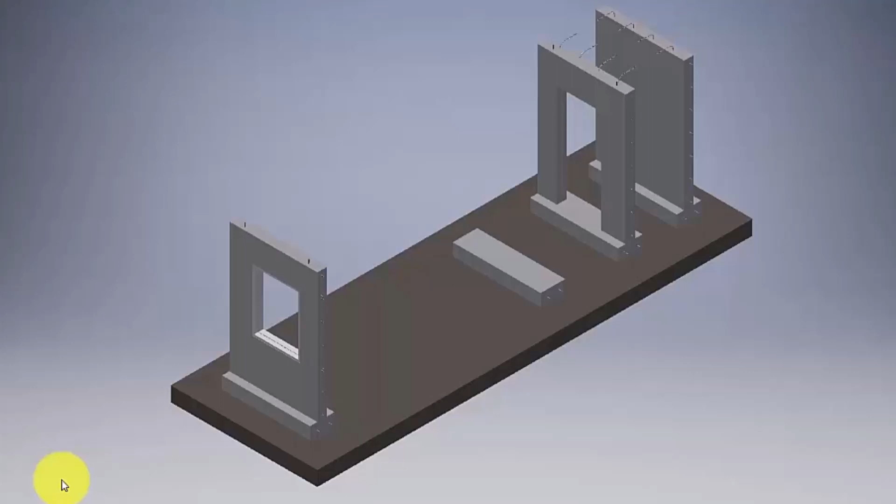Now we will add the floor. When pouring a foundation floor, first gravel is put in all the way up to the top of the footings. This will support the concrete.

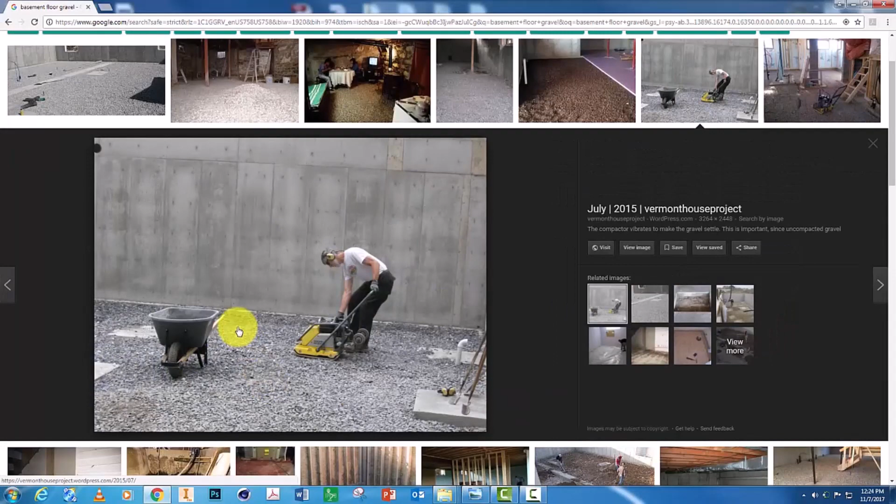Wire mesh is put on top of the gravel and then lifted up as the concrete is poured. This helps further reinforce the concrete. And then the concrete is poured and finished.

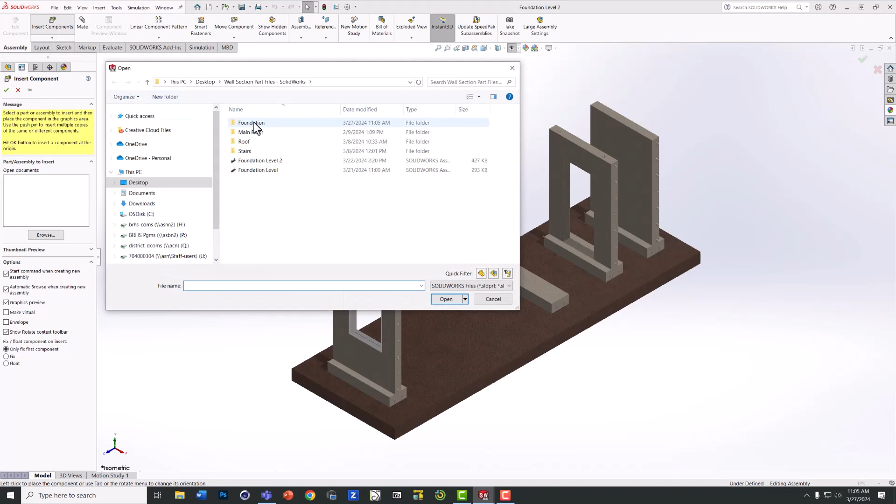Insert in the foundation folder gravel. This doesn't look too much like gravel, but it's going to be hidden anyway. Let's hit mate and start putting some relations on this.

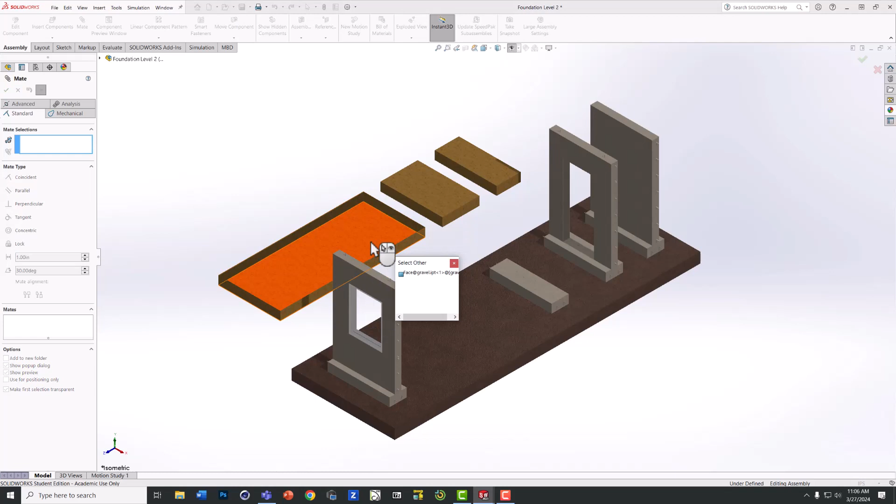First, I want the bottom of this gravel to be on the ground. So I'm going to right click right here in the middle, choose select other, and hover until I see the bottom light up. And we'll put a relation between that and the ground. Hit check mark.

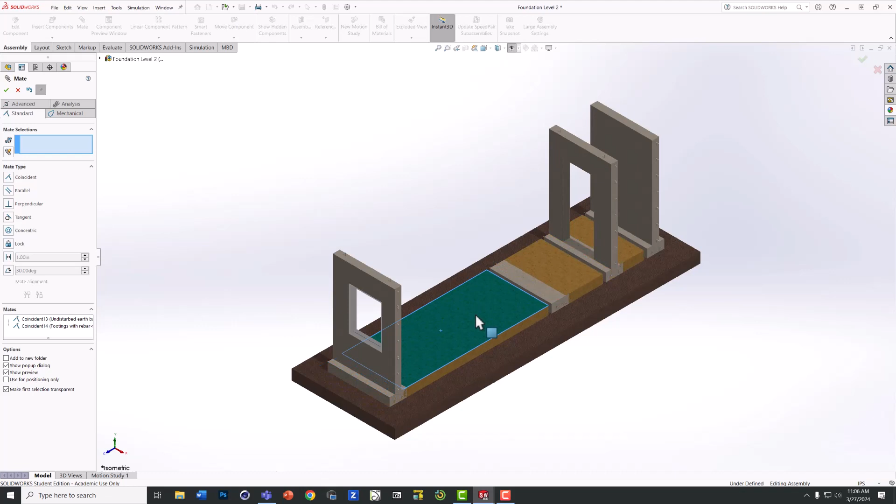Next, let's go side of the gravel to side of the footing. Check mark that, and then the last thing I need to do, I'm going to grab this and move it. You can see it'll only move in one direction because there's only one direction left for it to move. I think I'll move it just like this so I can see a little gap here.

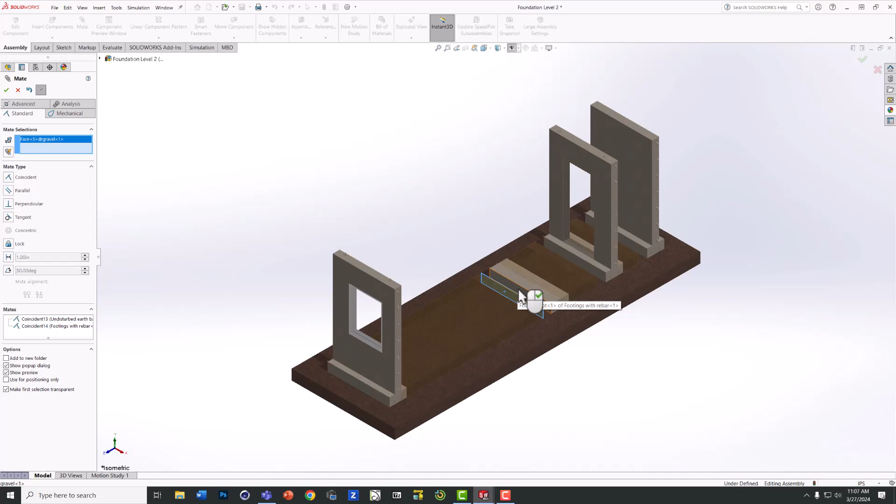I'll right click right here and choose select other, and I want this side, there we go, to be flush with that side of the footing.

So our gravel's dumped in. Now we're ready to pour the cement floor. So I'll exit the mate command and insert foundation slab.

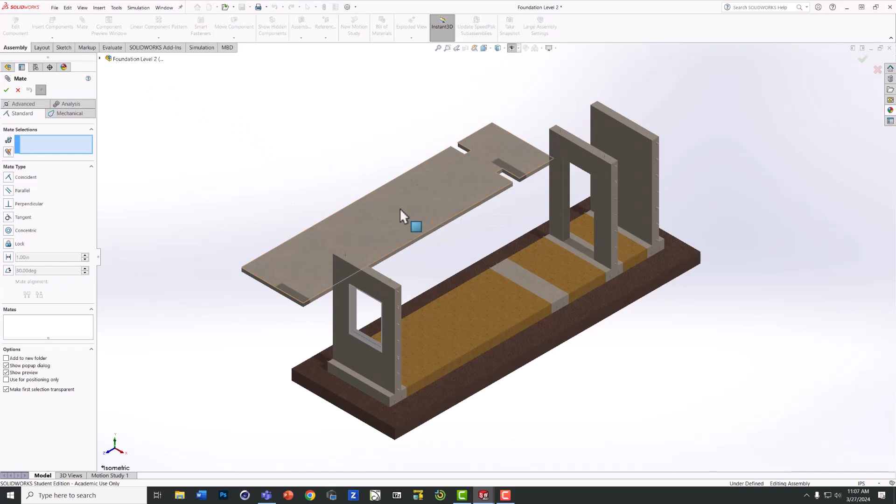And we'll go ahead and put mates on this, very similar to how we did the gravel. I want the bottom of that to be touching the gravel.

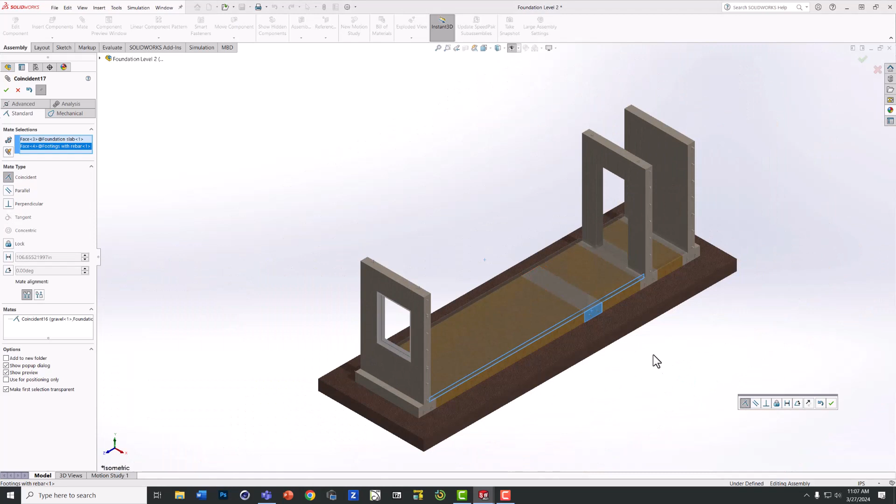The side, make sure I get the side there to the side of the footing. Let's check mark that, and then I'm going to back it up a little bit so that I can have something to work with here.

Okay, let's right click here and choose select other. I want this side of the foundation slab to touch that wall right there.

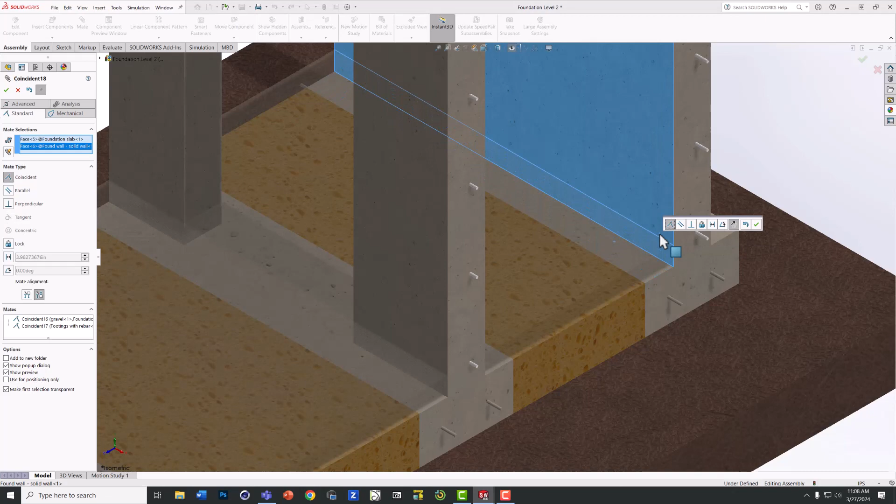And now our floor's in. We can assume that there's wire mesh in there that's reinforcing it. I'll press F on my keyboard to center this.

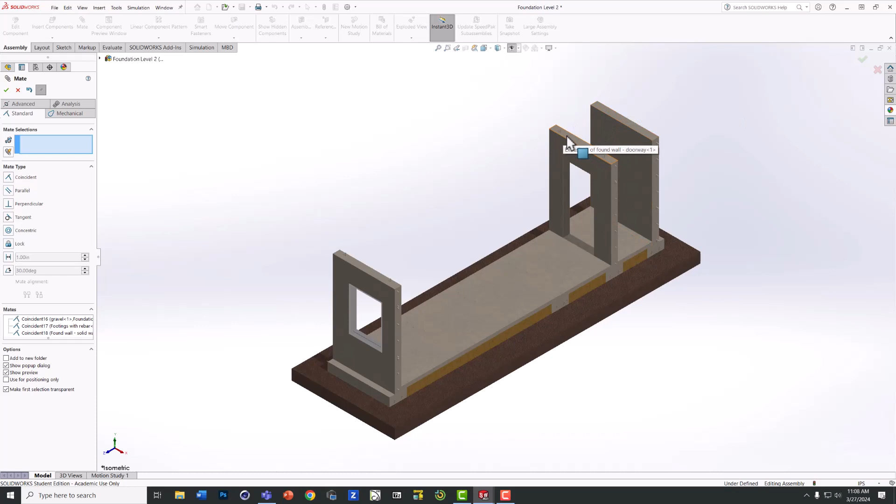We added anchor bolts in these foundation walls, and we're also going to add some rebar here. There's not going to be a wall attached out here. It's going to be a porch, a cement porch that we'll add towards the end of this project. But while the foundation walls are being poured, it would be good practice to add some rebar here while we add the anchor bolts.

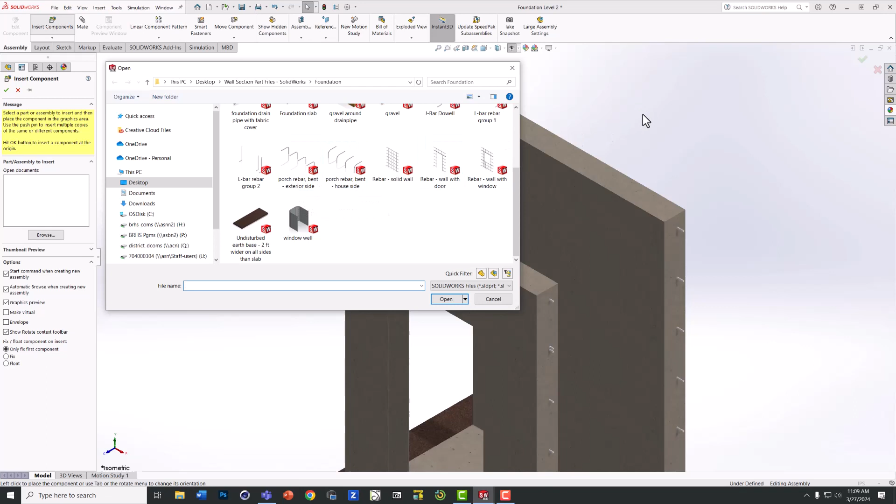So I'm backtracking a little bit here, but go ahead and we'll exit that mate command and insert porch rebar bent house side. We'll put this exterior stuff out here. So let's go with the house side first.

Place that in. And to put relations on this, let's go, I'm going to mate the bottom of this to the top of this footing, and then we're going to sink it down in later. So make that your first mate.

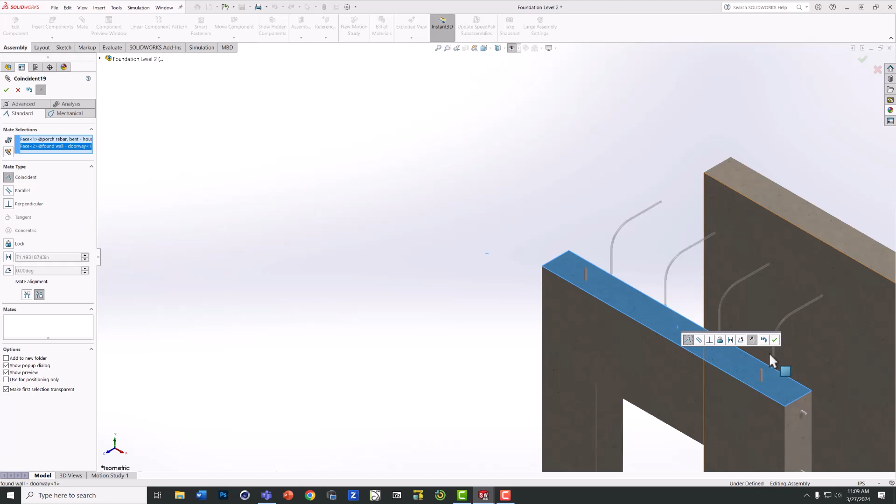If we sink it down in now, it's going to be hard to get the center axis, which is what I need to do next. So zoom in here, can be this first piece of rebar, and get that center axis selected.

And I'll select the side here, and we're going to set the distance, the offset distance to 12 inches.

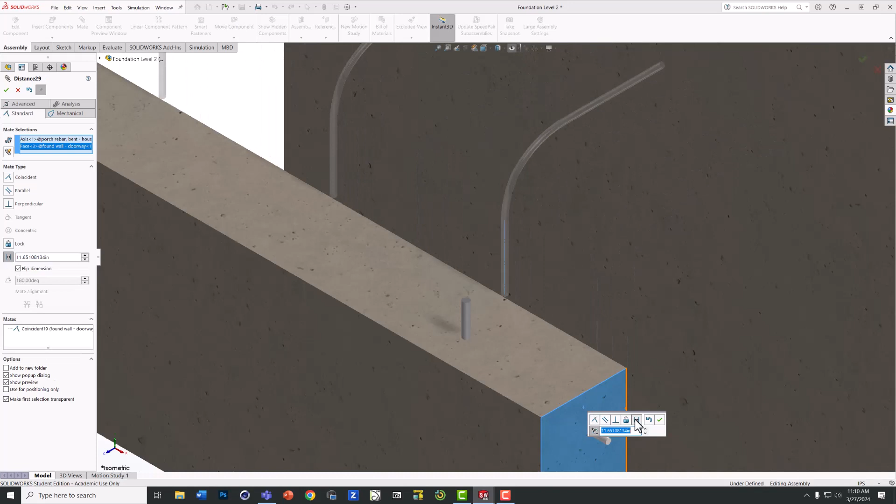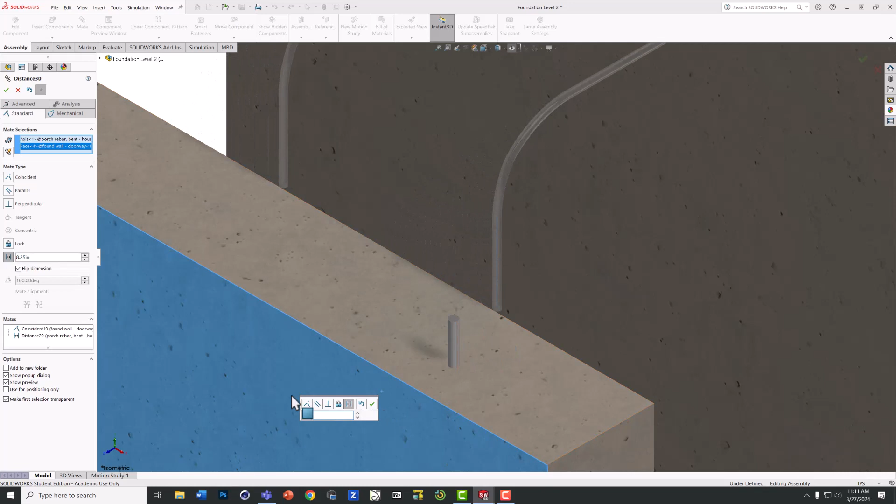And then we're going to get that center line again. We're going to put a relation here to the front. We're going to move it back quite a ways. It's going to be more to this side. So enter a distance of 8.25. Press the enter key, make sure it moves the right way.

Yes, we'll have anchor bolts on this side, which is where we'll attach the wall. And then we'll have some room here in our foundation wall to put the rebar. Go ahead and hit the check mark on that.

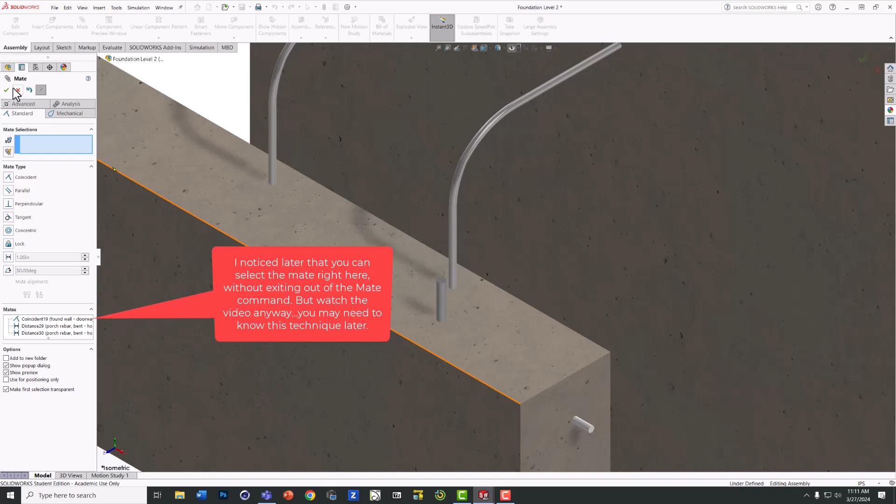And then to drop the rebar down in, we need to exit out of the mate command and open up our mates right here. And go down to the end of the list. This is the last mate we put in.

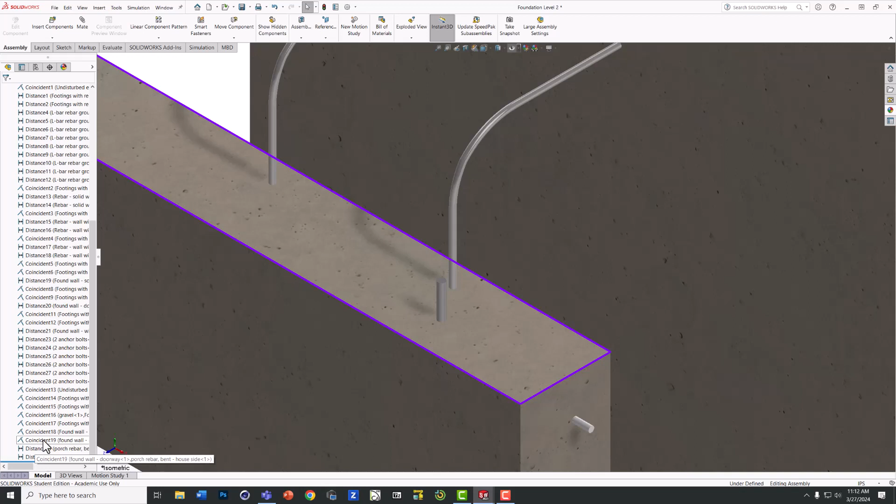So if we go back 1-2 steps, this is going to be the mate we need to adjust to sink that rebar down farther. If you right click on that, you have an edit button here with a pencil, and then your distance button becomes available.

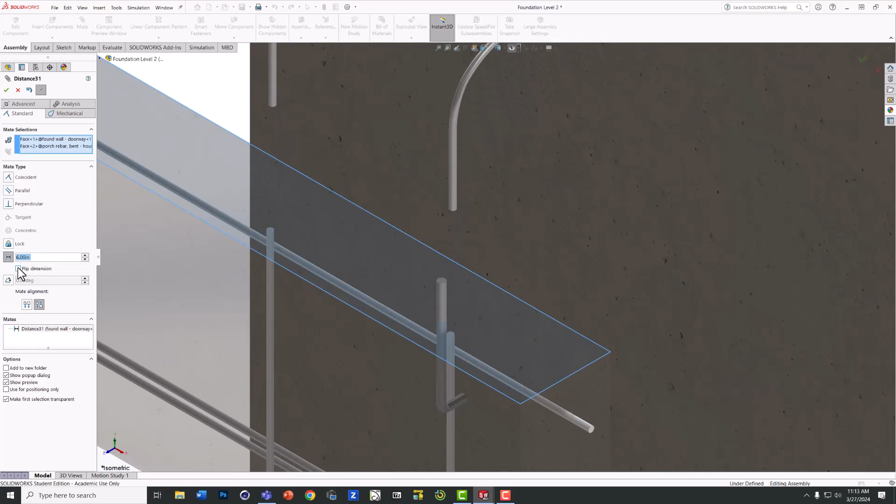Go ahead and drop that down 6 inches. Press the enter key, make sure it goes the right way. Mine didn't, so I'm going to hit flip. There we go. Then hit the check mark.

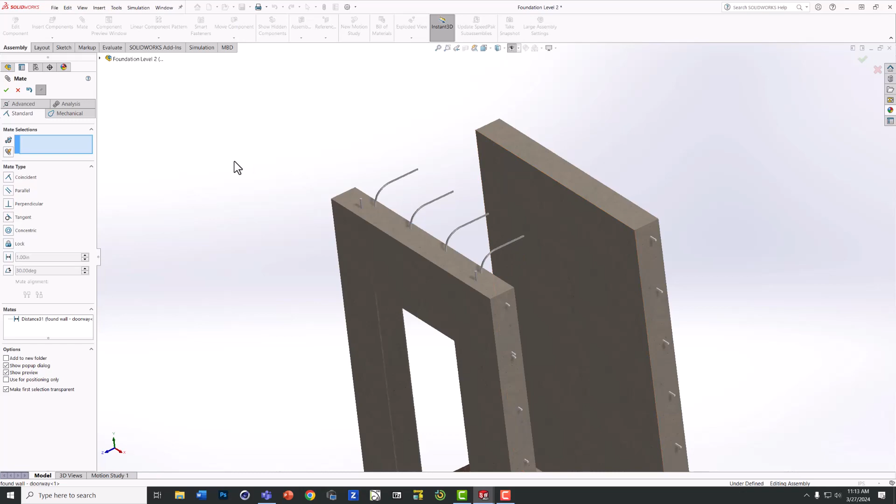When this rebar is put in and then the foundation wall dries, it can be bent down like this later. Let's go ahead and finish the mate command. Insert porch rebar exterior side.

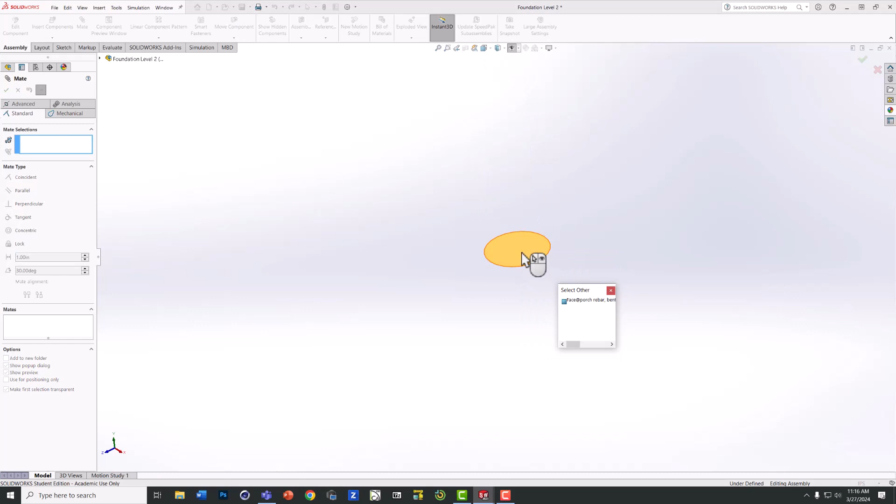Let's start our mate command here, and we're going to select the bottom of this piece of rebar again. So I'll right click and choose select other. Make that orange and blue, and we're going to go ahead and mate it there to the top of the footing. Mine's still floating out in space, but that's okay.

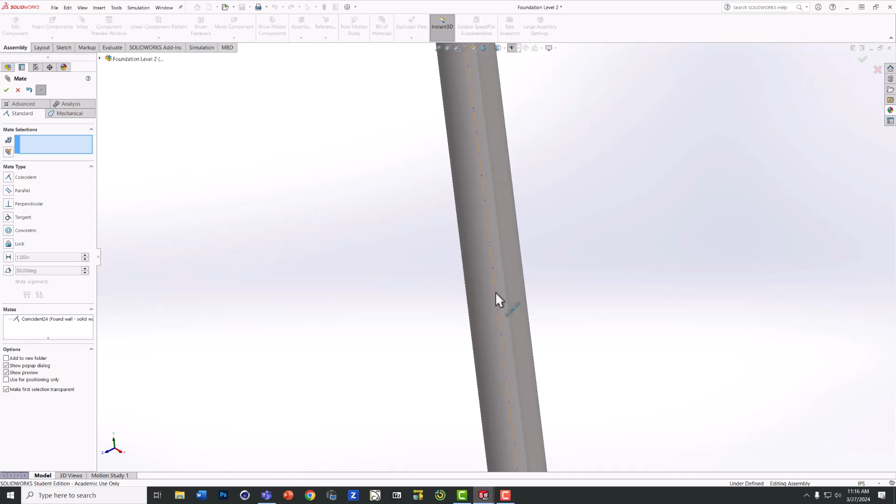And then let's get the center line on our next relation here. Took a couple seconds for that to appear, but it finally did. I want the center line aligned here, and then distance, let's go 12 inches. Press the enter key. That looks right.

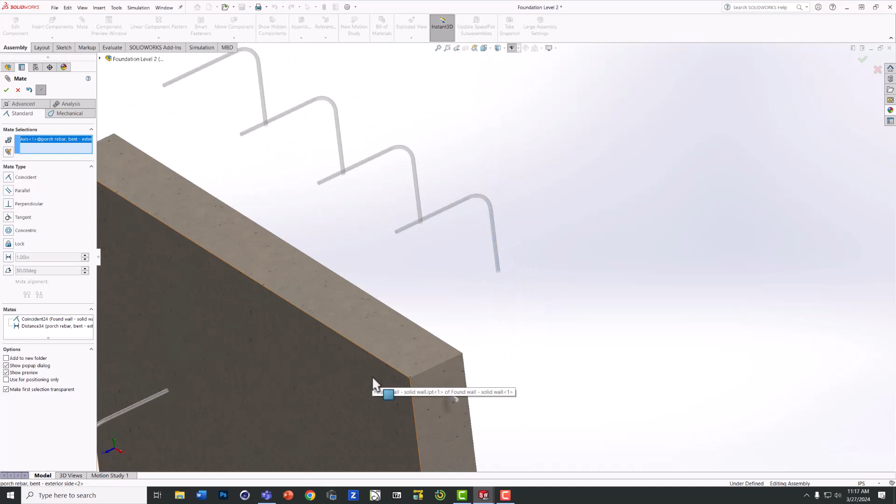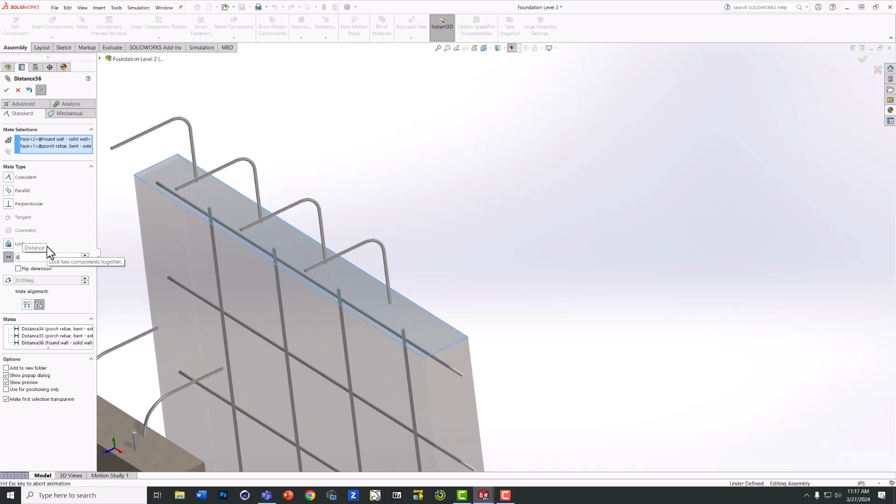And then center line, and let's go from the front here, and let's do a distance from the front of 3 inches. I don't need to exit out of this. I can just find my mate right here in the list before I go back and edit it. So just do that. That coincident mate should be your first mate, and then hit your distance and set it to 8 inches. Press enter, and I'm going to flip that so it goes down.

And now we can hit the check mark and hit the check mark once again. When it comes time to prepare to pour the porch, more rebar will be added here and tied all together to help make that porch really strong.